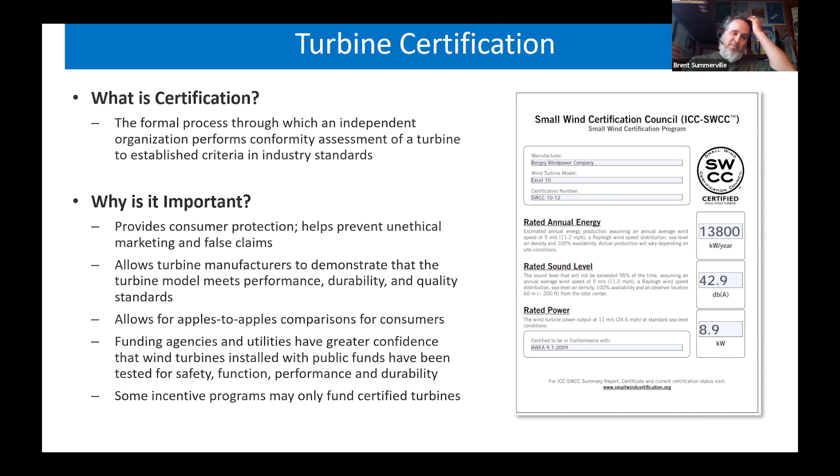State level incentives have been in great flux, but I just pulled this text out from a recent IRS notice of proposed rulemaking for Section 48 commercial tax credits. And finally, after much help from the Distributed Wind Energy Association and the Department of Energy, we've got an updated list of eligibility requirements for these proposed tax incentives.

And so the good news is they have a requirement that the small wind turbine must meet the quality standards of the AWEA standard 9.1, IEC standards that apply to distributed wind and small wind, and they've proposed to add the new ANSI ACP 101-1-2021 small wind turbine standard and subsequent revisions. So that's good news. We've been pushing for the IRS to keep things updated per the standards, and now they have a proposed rulemaking text to do so.

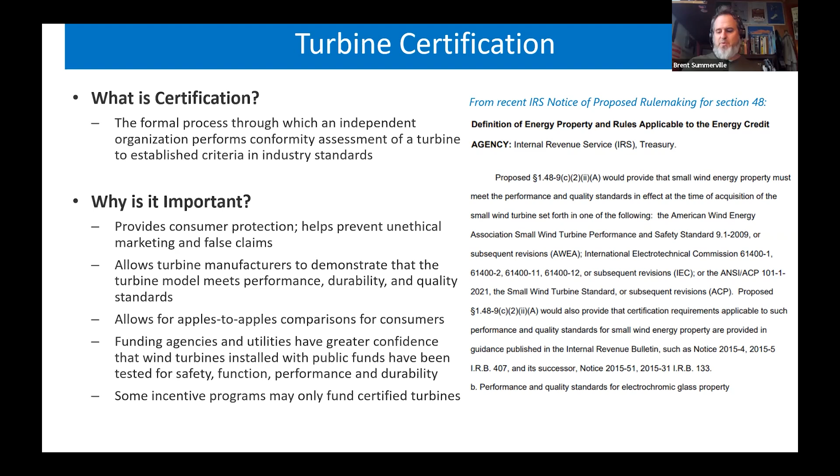So this is really what drives the motivation to certify your turbine, not only for these reasons shown here, but to just be eligible for, to have your customers be eligible for these incentives.

So where are we with the small wind turbine standard? Well, it all kicked off at the very end of 2009, where the industry worked hard to create our own national standard, AWEA standard 9.1. And it has been utilized by testing organizations, turbine manufacturers, certification bodies, incentive agencies, and consumers for many years. The standard did go through a revision cycle through AWEA, but there was some flux and change within the AWEA organization.

ANSI remanded that revised SWT-1 standard that came out in 2016. And then after that, AWEA became ACP, American Clean Power Association. And then the industry worked with ACP, including NREL, Distributed Wind Energy Association, and other stakeholders to develop this new latest, greatest ANSI-approved ACP 101-1, which came out in late 2021. So that's their current small wind turbine standard in the US.

And here I'll pull this out of the distributed wind market report from Pacific Northwest National Lab, and it shows the number of new certifications per year. The standard came out in late 2009. SWCC was stood up in 2010, and then certification really took off in 2011, '12, and '13, bringing up the number of certified small wind turbines to about 13. Another bump up took it to about 17 in 2018.

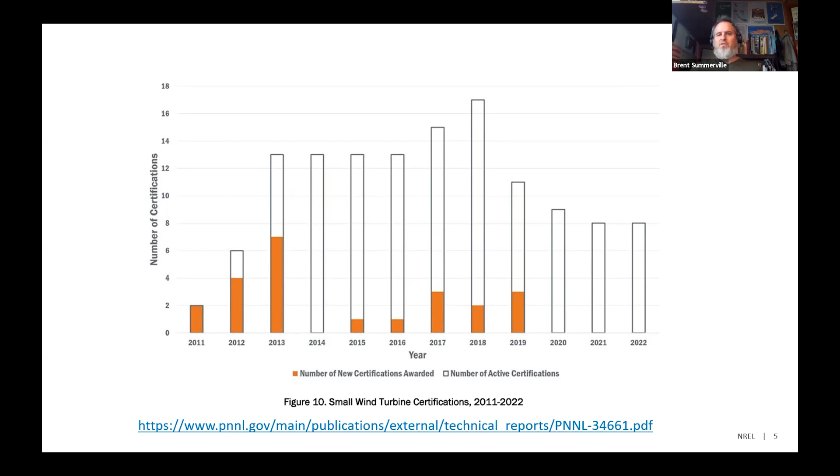And then, as Mike Bergey noted earlier, it was a rough few years for the industry. Some of the manufacturers focused elsewhere, and certifications expired, and we settled back down to now, I think, 8 certified turbines, and so it's picking back up again.

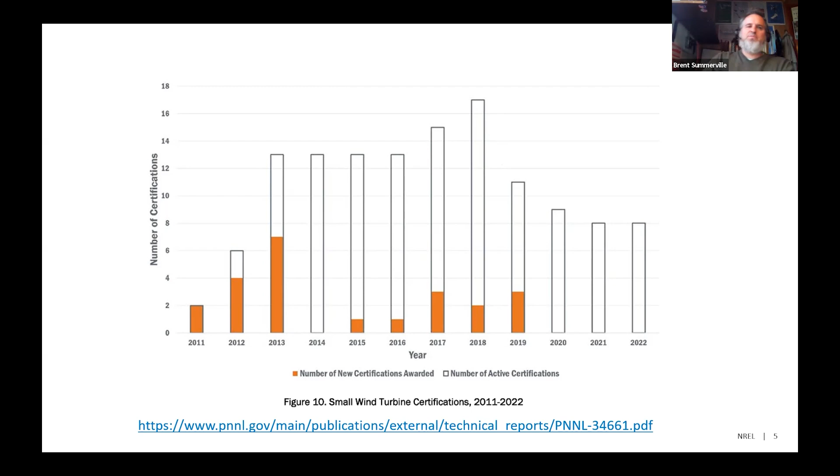But back to that ANSI ACP 101-1 standard, something new. These are all new things in the standard. The scope used to follow the scope of the international standard IEC-61400-2, which would be 200 square meters of rotor swept area in modern turbines with a low specific power, these days that's a 20 or 25 kilowatt machine. But we increased the scope to apply to turbines up to 150 kilowatts of peak power for this standard. So that was a sizable increase.

It's broken up into sections, and it's not a standalone standard. In other words, it points to and incorporates the suite of IEC standards put out by the International Electrotechnical Commission, where groups of experts work all the time in the background to develop and maintain the standards for many, many products, including wind energy. So it'll say, go do a power performance test per IEC 61400-12-1.

The small change here is that since the anemometer and the turbine tower under test are so close, we see site calibration values where you have an anemometer to measure the wind, and one where the wind turbine will be, and you compare those wind speed measurements to get a correlation factor. We see those factors really high, in the 0.98, 0.99 range, meaning the measured wind speed is very similar to the wind speed at the turbine.

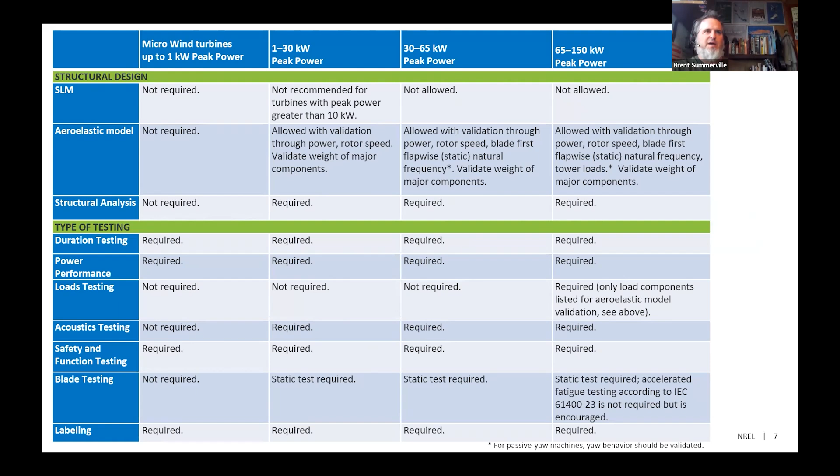So there's a little table at the very back of the standard, which is for sale on the ACP site. I can dig up a link later and put it in the chat, but we've got categories here. Under 150 kilowatts, there are 4 categories of sizes, from micro wind up to 30, to 65, and 65 to 150 kilowatts. So here you see that there are limited requirements for micro wind turbines.

You do a duration test, a power performance test, and a safety and function test, and you get a label, but you don't have to do a blade test, an acoustic test, or loads testing to validate your model, because there's no hard requirements for structural design at that level.

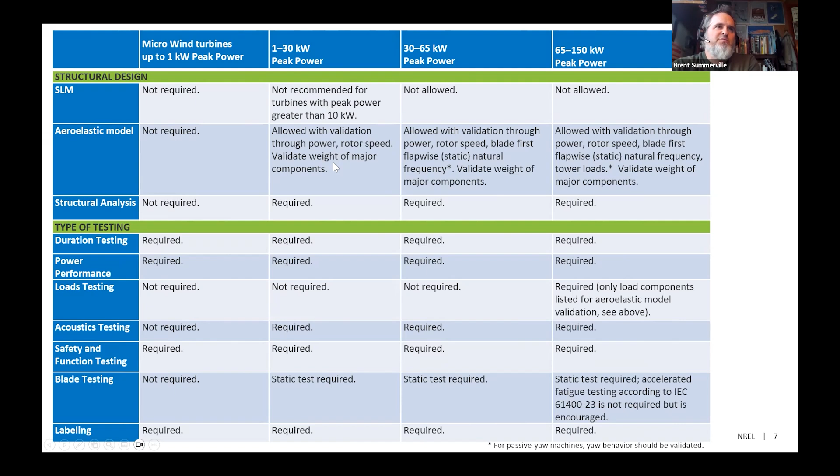For this level and beyond, we see increasing measurements for validating the aeroelastic model. We see varying requirements of the simplified load model across the sizes. And likewise, the testing requirements vary across the sizes, where blade testing is not required for micro, but is for all the others.

And when you get to the largest category, it is recommended, but not required, to do accelerated fatigue testing.

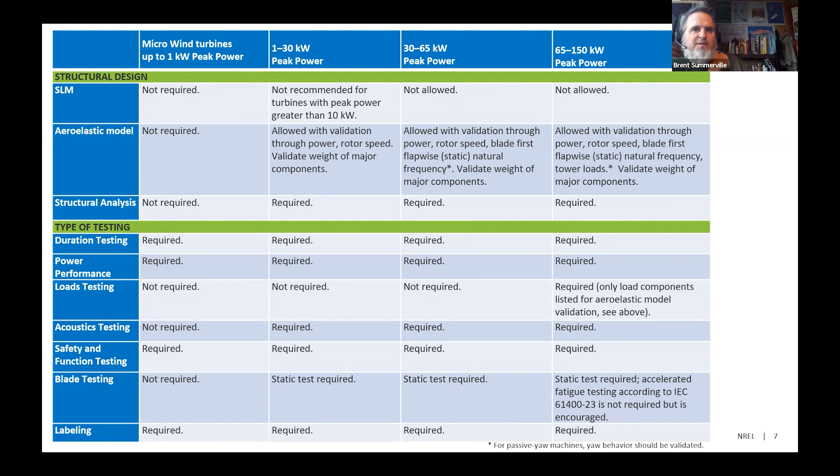There's lots of detail behind all of the changes made within the standard, and they're captured in this report. For example, the what-if analysis on implementing the changes to the duration test on some past tests showed it would take the average test period down from 10 months to 4 months, saving lots of time and money by removing a lot of requirements that did not show a lot of value, and boiling it down to a shorter test to assess the normal operation of the turbines.

So here's our current list of certified turbines from the PNNL market report: the Bergey XL 10 and 15, the Eveready Kestrel, EOCycle S series, the HiVawt Colite or the high volt machine, the DS3000, the Primus turbines are now operated by Rise Energy, the SD Wind 6 kilowatt, and the SkyStream is back on the list.

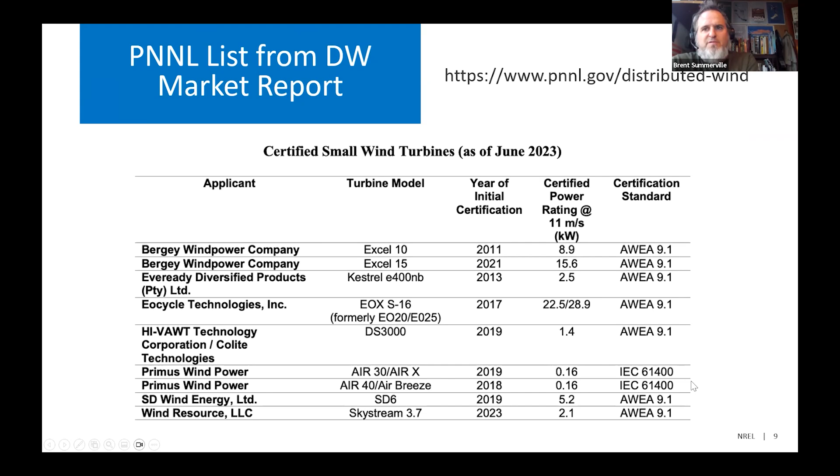Several companies are in the process here, but these are all certified to the old AWEA 9.1 standard, except for the Air series, which were certified to the IEC standards.

Okay, so that was the current state of certifying a small wind turbine up to 150 kilowatts in the US. We've reached a pretty good space where we have a certification body and a standard, and things have been going for a while. The other option, as you heard about a bit yesterday when we talked about the topic areas,

is type certification through IEC-RE, which stands for the IEC System for Certification to Standards Relating to Equipment for Use in Renewable Energy Applications. It has a system for wind, solar, and marine technology. It's a global certification system, intended to be usable for global markets, instead of a national standard intended for a national market.

The IEC-RE develops operational documents, ODs, which describe the requirements of type certification to the relevant IEC standards. This replaces the old -22 standard, which described type certification. And they have two routes.

One is through operational document 501, which is wind turbine type certification for wind turbines of any size, per the scope of IEC 61400-1. If you go look at the IEC-RE website, you see over 100 valid type certificates listed, and these are multi-megawatt turbines with very large rotors.

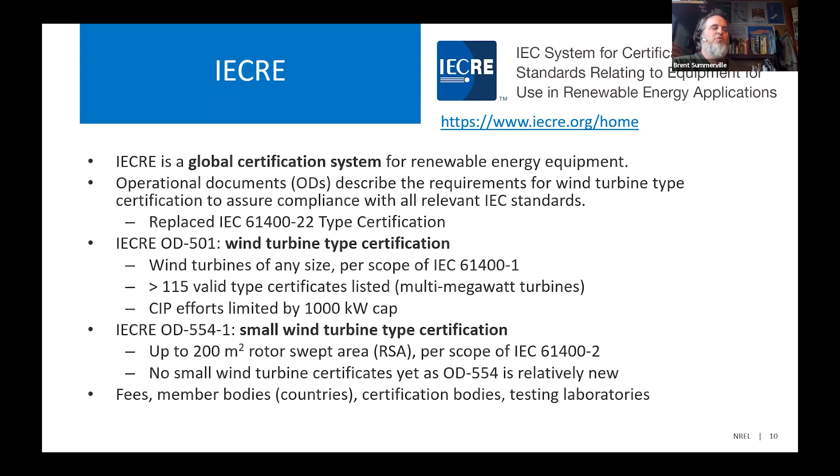And IEC-RE is unique in that it's a self-contained scheme. Member bodies, which are the countries that participate in the program, pay fees to join, as do member certification bodies, testing laboratories, inspection bodies, and other members.

For example, if you go to the IEC-RE website, you see their list of member certification bodies that are actively offering type certification in the IEC-RE system.

So we've got two different pathways here. In the US, ACP 101 is your standard if you're up to 150 kilowatts, and the ICC-SWCC is your certification body. If you're looking at a larger turbine outside that scope, or for a global solution, you can go the route of IEC-RE.

And this type certification on the small wind side, both ACP and IEC-RE both point to the International Small Wind Turbine Standard IEC 61400-2. Currently, the scope is up to 200 meters squared rotor swept area.

I am the convener of the maintenance team for this standard. Maintenance teams are called MT, and this is for -2, so it's MT2, and we are actively working through the 4th revision of this standard. It kicked off in May of 2023.

The current standard is stable and will not be touched until the very end of 2025, so we are targeting 2026 for a new -2 standard. It took a long time and a lot of discussion, but

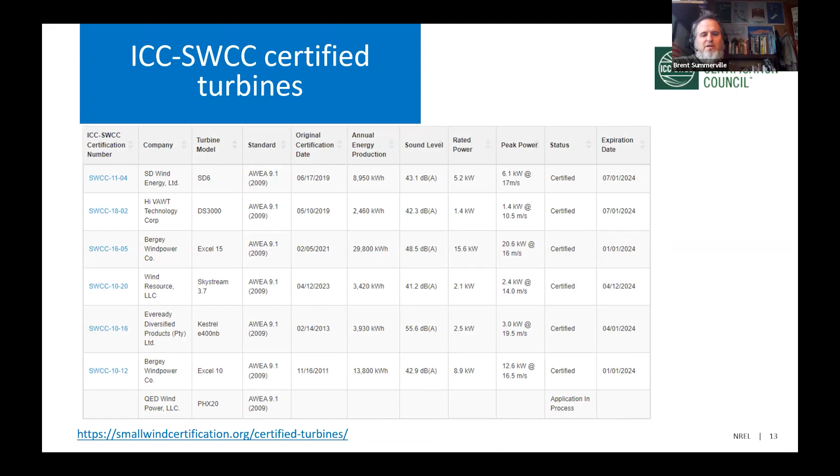All right, great. Thank you very much, Brent. It's a pleasure to meet with all of you. I'm going to be going over a bit of information about the certification process that SWCC operates in the US.

Using primarily ACP 101-1. Many of you may know SWCC from our previous name. It was independent up until about 2017 when it joined the ICC-ES organization, or International Code Council. ICC-ES is the branch that certifies a wide range of building products. So small wind certification fit neatly into there, and we're happy to have that alongside some of our other renewable energy certification programs.

So I'll be talking a little bit about the approach that we use. If you've worked with SWCC in the past, this should be relatively familiar, although for some of you this may be new. I'll be talking about something called preliminary reviews. We use preliminary reviews as a means of starting the certification process, and I'll explain a little bit why. Before I get into that, though, I just want to make sure that we're on the same page as far as what certification is.

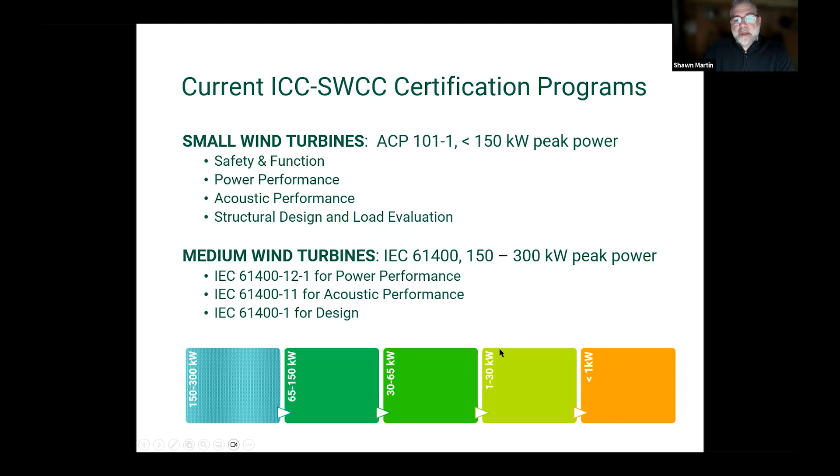So let's talk a little bit about what's in and out of scope. Oftentimes there's some confusion on this part as well. First of all, our certifications cover turbines. We're looking at things like the blade, shafts, gearboxes, bearings, and so on and so forth. You can read down through.

Notably, there's a couple of things that aren't included, and Joe Sposey yesterday touched on electrical listings. That is under a completely different standard. We are asked this fairly frequently, but electrical safety listings are not included in ACP 101-1 or 61400 standards. Now, we do look at them, but only in the context of durability overall, and in terms of the standard power production ratings that are generated as a result. So we are not looking at electrical safety. We are also not looking at that for the generator, the inverter, or any power conditioners, or the associated controls.

The other thing to note is it does not include the towers. That includes the foundations and any tilt-up devices or mechanisms. The ACP 101 and 61400 certifications end at the mounting point to the tower. So it's important to understand what's in and what's out.

Okay, a little bit about the pathways, the ways you can reach certification, and the way that preliminary reviews factor into that. I'm going to delve into that now. I've denoted them here with A, B, and C. A is a new certification - that is a turbine that has not been tested to the standard yet.

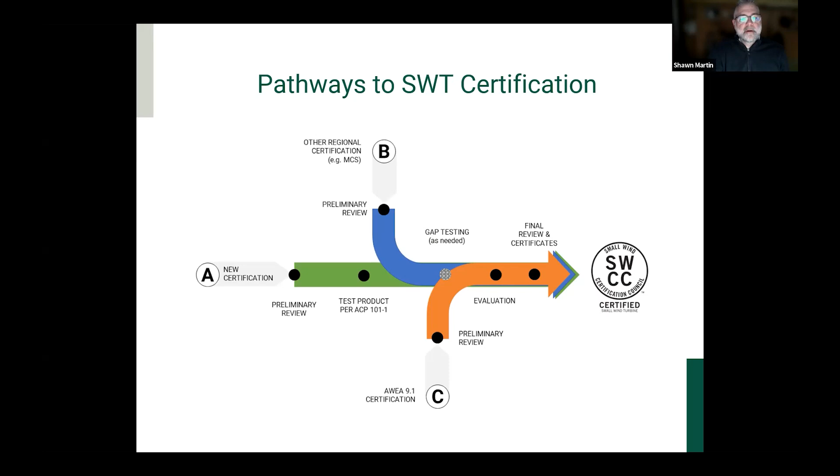Lastly, in some cases, you might come in with an AWEA 9.1 standard certification to the older version of the standard. Again, same thing, we would review the circumstances of it, and determine whether certification can be granted based on the information contained within those reports and analyses. So all of those are potential pathways, but they all begin with something we're calling preliminary reviews. So let's talk about what they are a little bit more clearly and get into the specifics.

We do preliminary reviews for several reasons. Number one, first and foremost, we confirm eligibility for SWCC certification. We don't want to waste your time or anybody's time if it turns out that your turbine is not within the scope of the certification program. So that's the first key point right up front: is it eligible? If it is, we move to the next steps.

We might look at any existing test reports or analyses you may have to see if we can use those. If you don't have them yet, we might look at your test plan and how you're going to be doing that, where you're going to be testing, what organization you'll be testing with, and what kind of testing configuration you have in mind to qualify with the standard. We want to get you confirmation early that you're on the right track.

We would then establish the scope of the testing that's necessary. As we talked about before, the testing requirements scale with the different categories, with the size. So we would work with you to identify specifically the tests within the standards that would be required for your particular turbine, because they do vary based on size and other criteria.

We would vet your testing organization, whether you've done your testing yet or not. Either way, we review the testing organization's suitability to see if the data is acceptable. If you haven't done it yet, we would vet the site and the organization's qualifications, and we would review your general test plan for consistency with the relevant standards.

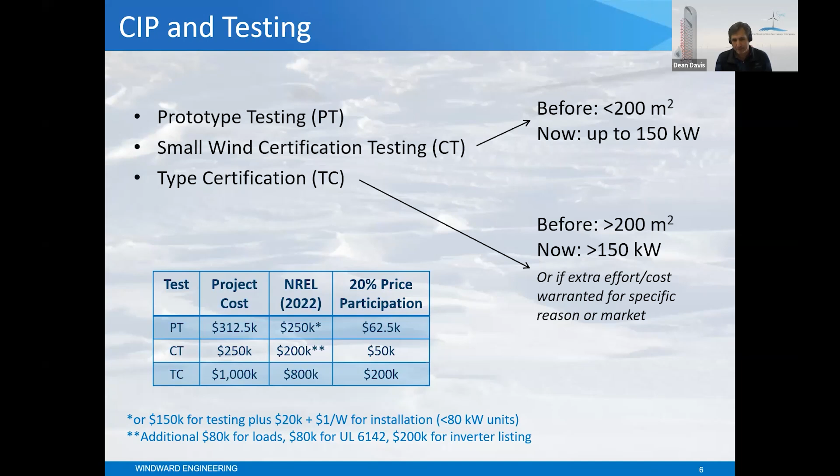So what is involved or required in terms of certification? I'm leaving prototype testing out, although I think it makes a lot of sense, if you were doing prototype testing, to still follow these testing standards. It's a little meaningless to prototype test and not set it up like the standard, because at the end of the prototype test you might be interested in getting more funding or investors, and you want data that is of quality that will be accepted by others. So although I'm not focusing on prototype testing, because who knows what the goals of that are, I think knowing the standards, and testing to the standards, still makes sense under prototype testing.

But in terms of certification, we've got design evaluation, and Shawn went through some of this. And then we really have these 4 required field tests: power performance, acoustic, safety and function, and duration.

For type certification, you still have the design evaluation stuff, but the tests are slightly different. You still have power performance, safety and function, but you also have mechanical loads and blade structural testing. Acoustic is actually optional. And then there's some additional stuff around manufacturing and a final evaluation.

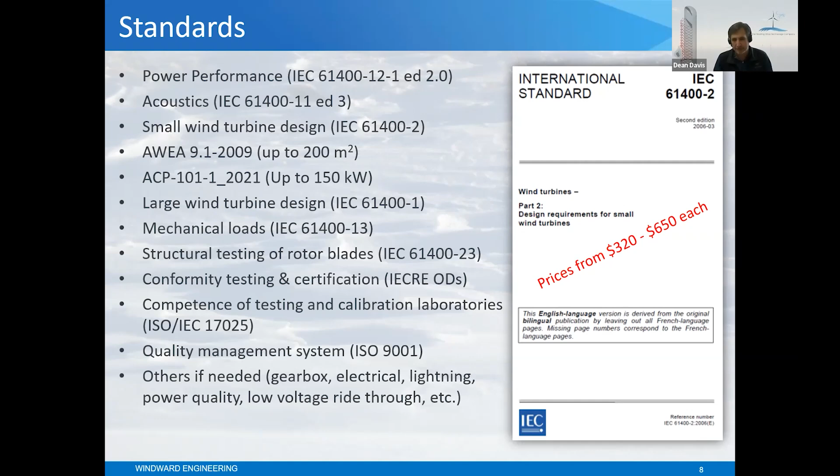If you're a manufacturer interested in certification, you're going to need to work with some certifying body. For me personally, I've worked with SWCC and Intertek, but I believe there's a longer list than that you can work with, including UL, DNV, and some others.

NREL has tested numerous small wind turbines to the standards. They're at the Wind Technology Center. UL down in Texas has a test facility. Renew Test is nearby in Pampa, Texas.

I wasn't sure if Appalachian State is still doing some work, but I think Brent showed there was a test going on, so it sounds like they're still doing some testing. Yeah, only Rocky is there with Sunsight at the moment.

And then I have Intertek here, which was in New York. I asked Joe, is that still up and running? And it sounds like it's not. So that one's not around, although Joe Sposey is the one that set that test facility up and really made it happen. He's a great resource for anyone interested in doing testing, and he'll set you up with some other location. And then one that's new to me is Wind Test North America, which is in Iowa.

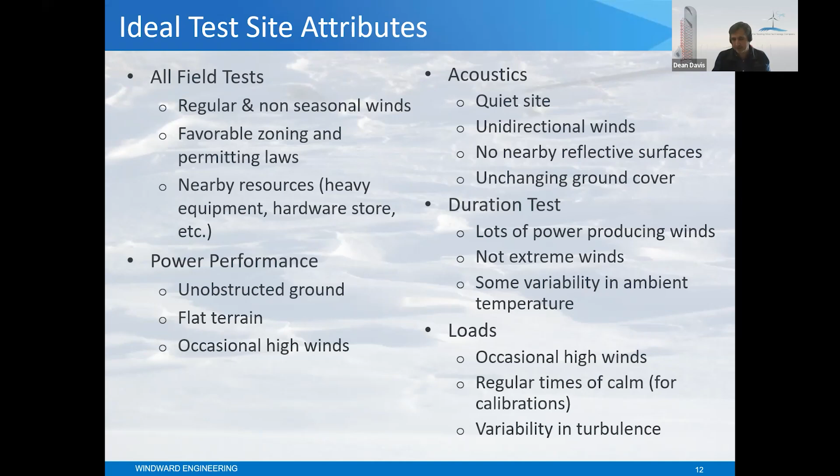So the ideal test site might not exist, but shortfalls can be mitigated with ingenuity, time, and money. Our site checks a lot of boxes, but in terms of flat ground and unobstructed, it's not - it's a very congested site. But we can work around it.

Getting into more specifics of power performance - I start with power performance because I see that as kind of the foundation test. I like to set up my tests for power performance, and then I can use that same instrumentation for all the other tests. For acoustics, I can use it for duration, for safety and function. So power performance is kind of a foundational test.

So I would put my Met tower in accordance with power performance. I would set up my instrumentation in accordance with power performance. And this would apply for prototype testing as well.

When you are doing power performance for certification, the IEC standard has a section around obstacles and how to evaluate those, and whether you're going to exclude sectors - wind sectors. An obvious wind sector you exclude is when the wind turbine is upwind of the anemometer - that's always going to be an excluded sector. But if you've got a big building off to the side, that might result in an excluded sector as well. The standard goes through those details on how to evaluate obstacles.

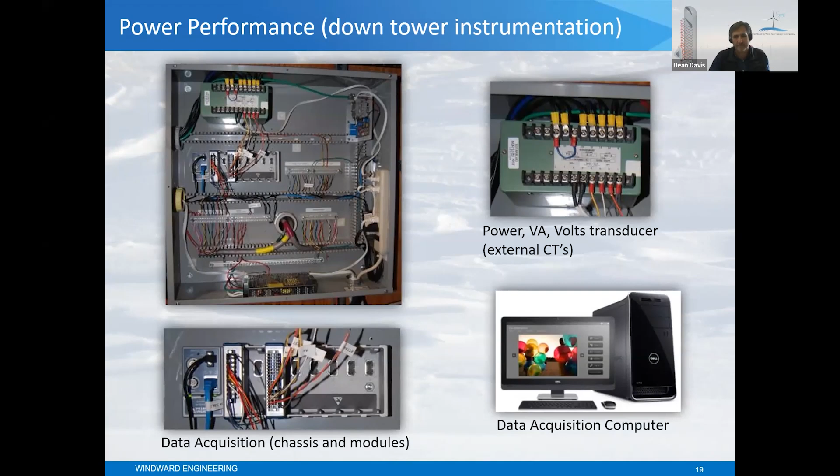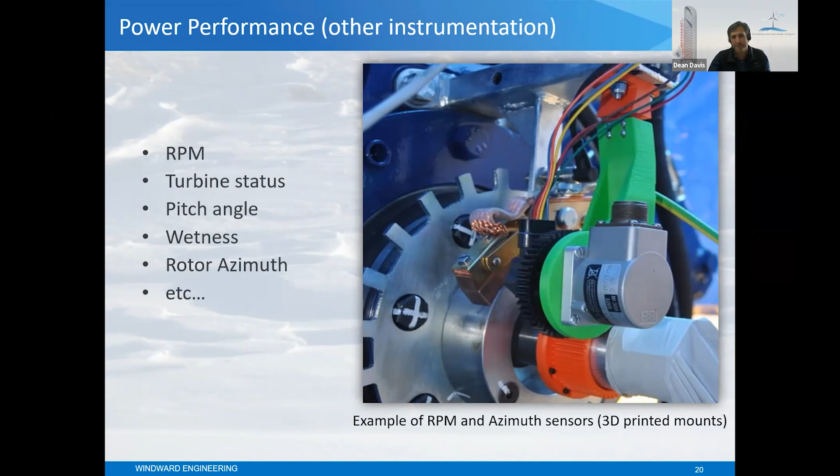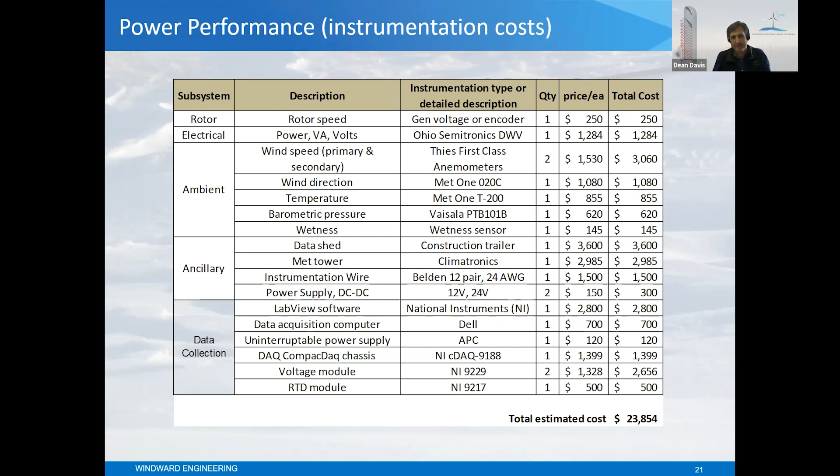Here I just kind of wanted to throw something in here around some of the cost of this instrumentation. Now, I haven't gone through these numbers in a few years, and post-COVID, seems like everything's significantly more expensive. So I'm probably on the low end at this point. But again, I just want to throw a little bit of an idea of what some of this stuff would cost.

All your sensors are going to end up needing calibration sheets. If you're buying new sensors, you can just request that it comes with the calibrations, or if you have sensors already, you can send them to Transcat, or there's various calibration laboratories that you can send your instrument to and get calibrations for. You're going to need those calibration constants to set up your data acquisition system. There's uncertainty information in there that's going to be required for your uncertainty analysis. These calibration sheets will end up going kind of as an annex or an appendix in your final report. So they're important in that regard.

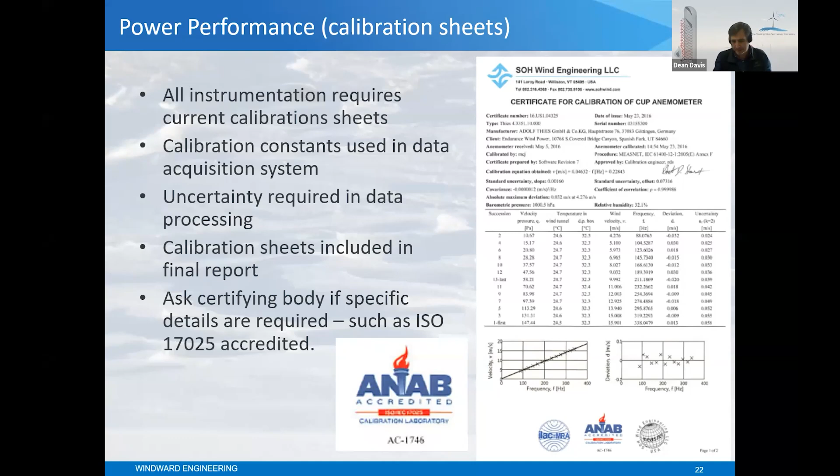And I've run into situations where I've been requested to get 17025 certified calibrations, versus other times it hasn't been an issue, but you might want to talk to your certification body on if that's a requirement or not. And usually a 17025 is a little more money type of thing.

So, okay, at this point, let's say you've found your test site or you're working with an agency, you've got your instrumentation all set up, you've got your DAQ system, and you're ready to start power performance. So what does the standard say in terms of requirements? Obviously you can't collect data for 2 hours and then say, oh, I'm done. You have to reach some kind of thresholds to say you're done.

So I've got here 2 different scenarios, and this is all coming out of the IEC-12 standard. Technically, the -12 standard is for wind turbines in general, not for small wind turbines. So there is an Annex H that's for small wind turbines, and according to IEC, that would be less than 200 square meters.

So they want a minimum of 10 minutes in each bin, where the data set is a 1-minute data set, and the bin widths are 0.5 meters per second. And you want to go from 1 meter per second below cut-in to 14 meters per second. And the total data set is to be 60 hours or larger.

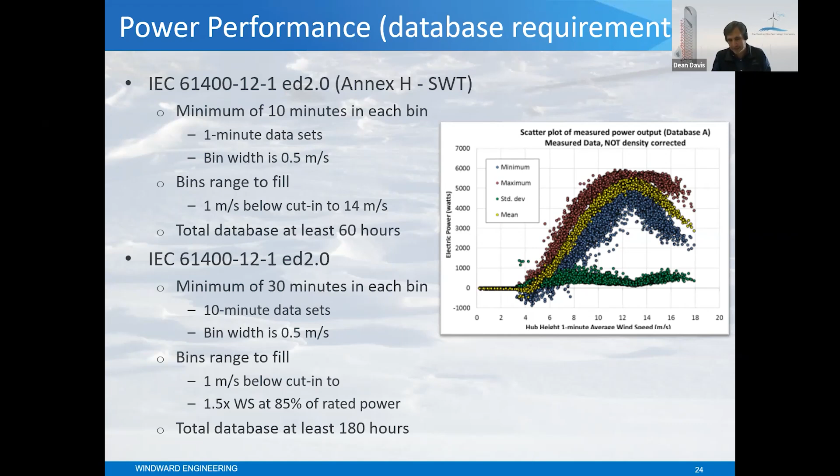And then if you're again in -12, but not necessarily a small wind turbine, now we want 30 minutes in each bin, and now we're dealing with 10-minute data sets. The bin width is still 0.5. Low end, 1 meter per second below cut-in, and on the high end it's this complicated 1.5 times the wind speed at which 85% of rated power is reached. And then about 3 times larger data set, they want 180 hours for the total data set.

And how long does it take to get that, to get 60 hours or 180 hours? It really comes down to how many sectors are invalid and how often the wind comes in those invalid sectors. For me, I usually have a very small allowable sectors, but our wind is fairly unidirectional as well, so it's usually not a big problem. But again, how much data do you have to throw out because it's coming from the wrong wind direction?

And then I think most commonly, you get your power curve, but you're kind of waiting to get those higher winds. You just need to see how that power curve is going to roll over and how high a wind speed you need to get to, to quote, complete this power curve. NREL suggests 3 to 6 months.

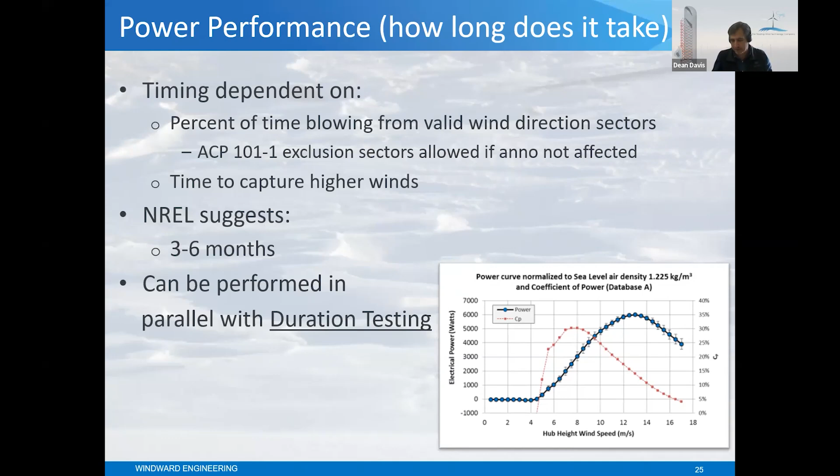For me, we can be doing duration testing, which is looking for this 1,000 hours of power production. We can kind of just put the power performance in that time frame. So in my opinion, power performance shouldn't be on the critical path. I think the duration test would be on the critical path and the power performance would just fall within it.

In terms of data processing, I think it's definitely within the realm of Excel. You might need some array functions. And if you're on a laptop, especially an older one, it might be a little challenging in terms of computing power.

The standard uses clear and well-defined equations. I don't think most people have any issues with the standard. It gives you the equation, what you're after, and describes what the variables are. That said, there's enough detail.

By the time you finish your Excel spreadsheet, you'd want to do some kind of checking. Maybe your certification body can do a round robin with you and say, hey, we've got this data set, we want you to do power performance and come up with your power curve with uncertainty on this data set, and do some checking. I think it makes sense. Although it's fairly straightforward and simple in some ways, there are a lot of details.

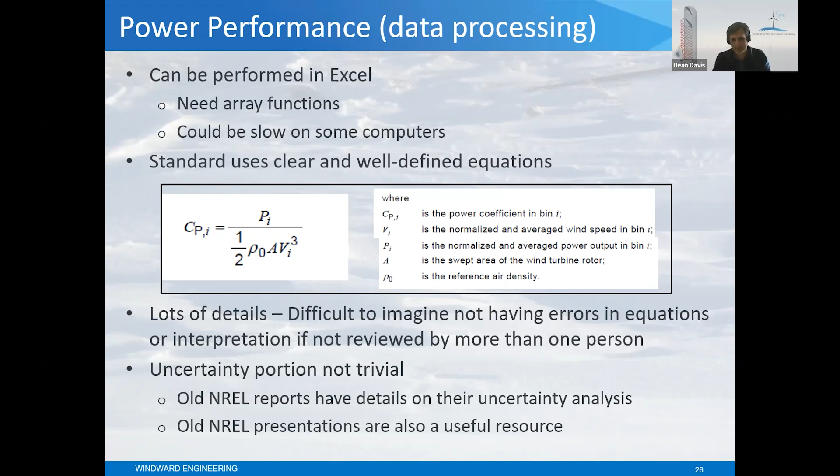The uncertainty portion is probably the harder piece. There are old NREL reports that have lots of details on their uncertainty analysis. I remember Arlinda put together some nice presentations around uncertainty, and Joe Smith as well back at NREL. So somewhere in the universe there are some good presentations around uncertainty analysis.

Okay, so now at this point we've collected our data, post-processed it, got our power curve and uncertainty analysis and that kind of stuff. We've got to put together this final report.

We can go straight back to that standard, -12, and it has a whole section on what needs to be in the report, again laid out step by step. So I think the standard's really good in just stepping you through this process.

And then we have this added bonus of NREL's got great templates out there. You can go look at the Swift power performance or various power performance reports that they have online. In a lot of ways I just say, you know what, those are excellent reports, I want to just make my report look like that.

Just as an example, it's kind of in the 50-page range, where about half of that is really presenting the data and describing details about the site and the turbine. And then the other half is appendices, around the site analysis and calibration reports and stuff like that. Here's just an example.

I pulled this off another presentation I did, but here's a power curve. From my experience, this is 19 days in. After about 5 days, maybe a week, the power curve is fairly stable. The first day it's not smooth, it's just not a smooth curve. The second day it's getting smoother, third day, and by the 5th day it's pretty smooth. It typically hasn't changed much after that.

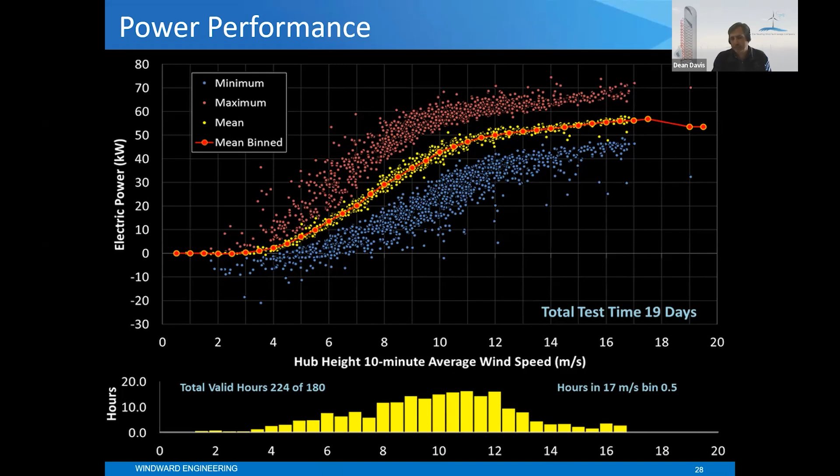So moving on to acoustic testing.

The good news is most of the instrumentation is now in place, assuming you've set up around power performance, and the test times are much shorter. The bad news is there are some serious challenges around the data collection. The post-processing is a magnitude harder, I think, than power performance. And you do need some new, expensive instrumentation. You need a microphone, an acoustic calibrator, a ground board, and various other pieces of equipment that you don't have after just doing power performance.

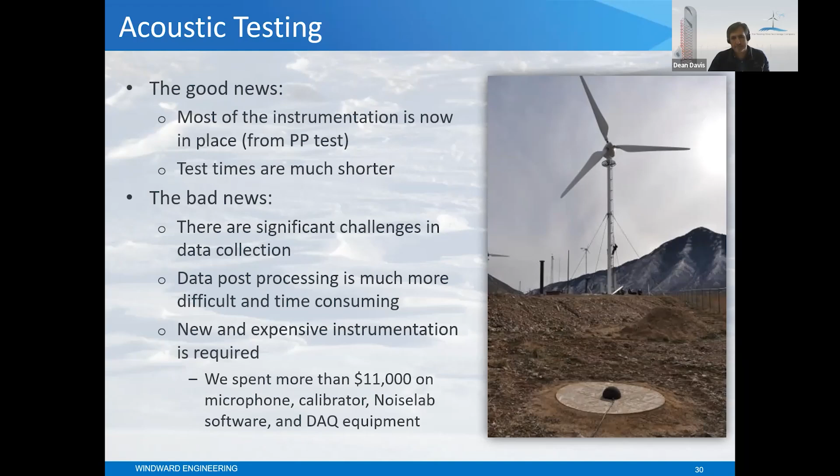As we saw in the -12 standard, the acoustic standard has an Annex F for small turbines. So that's for turbines that are less than 100 kilowatts, and it kind of gears itself towards that.

Here we need to go out to 11 meters per second minimum, with 1 meter per second bin widths. The standard also says, if possible, go up to cutout. I could see how, if you've got a small turbine that furls or flutters, 11 meters per second might not capture its total acoustic signature, so in that situation you might want to go higher.

Measurements are pretty short, 10 seconds each, and again 1 meter per second bin widths. We want 12 measurements for each bin with the turbine operating, and a minimum of 12 for the background with the turbine stopped. As you can tell, it's not a lot of data.

More likely you can collect this in weeks, not months. I think for me, typically, it's about a week, maybe a little longer. Sometimes I struggle to get certain wind speeds.

The microphone, as I mentioned before, needs to be downwind of the turbine. When you're dealing with larger turbines, that sector is kind of tight, plus or minus 15 degrees. With smaller turbines, they open that up, understanding that they're probably much more dynamic in yaw. The measurement chain needs to be calibrated before and after each measurement.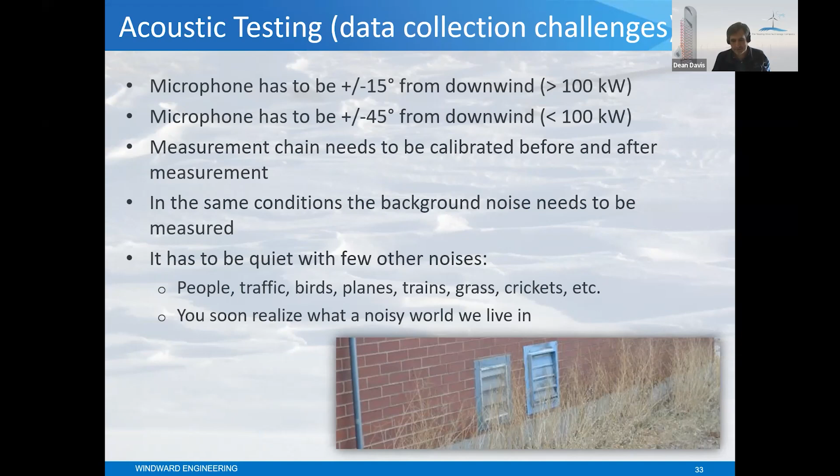This picture shows vents on a nearby building. Never thought anything of it, but out there at 3 in the morning, those vents are just flapping up and down in the wind. It just makes me realize we really live in a noisy world, and we kind of accept it - it's just the norm at this point.

In terms of post-processing, I've used Noiselab. I'm sure there's other software that's basically going to take that recording and convert it to data. For full automation, you probably want to be programming in something other than Excel. I've built my spreadsheet in Excel, but it really does max out my computer. Actually, for many years, I kept an old version of Excel because, for some reason, it ran much faster than the newer version. So that can be a challenge.

Again, as is the case with power performance, I think the standard uses clear and well-defined equations, but the equations are much more complicated. If you compare the CP equation I showed before and this one, there are multiple subscripts, terms raised to powers, and summations. So the equations definitely get more complicated in the acoustic world.

Interpretation of words can be challenging. While we were doing some round robin work one time, in my opinion, there was a sentence that told me to use one equation, but that came up with a very different result. When the certifying body said no, that sentence doesn't mean that, I agree with them - I think they were doing it the correct way, but to me that sentence did not say to use it; to me it said use the equation I was suggesting. So there are areas where just the words can lead you down the wrong path, even though the equations themselves are well defined.

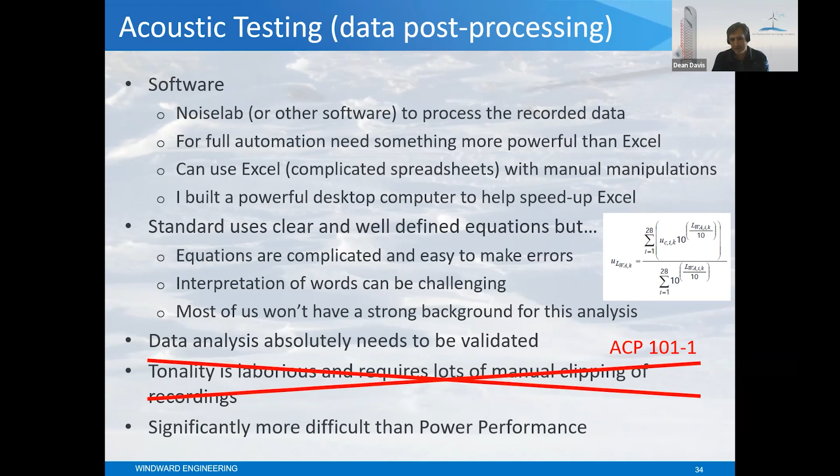On to the duration test. The purpose outlined from the standard is structural integrity, material and performance degradation, quality of environmental protection, and dynamic behavior.

And I think that is true, that's kind of somewhat what we're after. I think everyone recognizes that the duration test will capture infant mortality kind of stuff. Does it suggest it's going to last 20 years? I think we'd all agree it doesn't suggest that. But it gives us some basis to say this turbine operates correctly and not in some crazy fashion, and that it can handle some amount of variable input from the wind.

So the next list on the requirements, I've outlined what used to be the case within the AWEA standard. And again, one of the goals of the ACP 101 was to really reduce the labor and effort and costs associated with certification. So a lot of these numbers have been knocked down quite a bit.

Used to be this requirement about greater than 90% availability - that's been removed. At least 6 months of operation - that's been removed. It used to be 2,500 hours of power production, now that's 1,000. It used to be, and this was probably where most people got caught up, these higher winds.

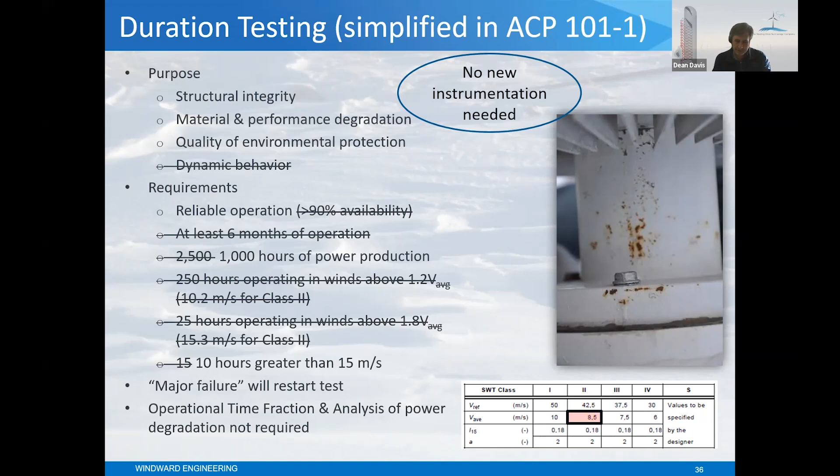Major failure will restart the test - that's consistent before and after. And this operational time fraction analysis of power degradation, which was required, is no longer required. And my little bubble over there - no new instrumentation needed. Again, if you've set up for power performance, you've got all this data coming in and you're just collecting more data.

Safety and function. You want to go through and look at the O&M procedures and other manuals, take a look at that, evaluate whether it's appropriate, review personnel safety topics. So if the turbine's something you would climb, does it have proper warnings and safety labels, and then a little bit of analysis or a check on the safety related around climbing.

The function side is really kind of similar to a commissioning procedure, but we're going to collect some data while we're doing that. We're going to make sure on a grid fault, does it properly shut down or get to a parked condition or idle condition. And we might pull a sensor, an RPM sensor or something, again just making sure it has a proper control system to put it in a safe condition.

We might want to run some specific events like high wind startups or high wind shutdowns. And then ultimately, we're going to look through the data. We're going to look for this peak power, which is described in the ACP power limitation. We'll make sure it can limit its power, and then rotor speed, make sure rotor speed doesn't get crazy.

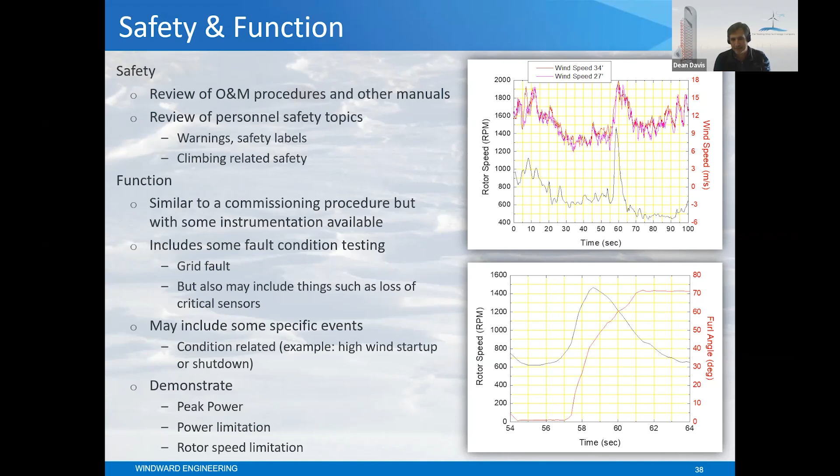I just threw a few plots in here. This is off a Whisper, but this was the highest - when I was doing some testing, the highest rotor speed just came out of a big gust that started at 7 meters per second and bumped up to 18 relatively rapidly, and caught that turbine unfurled and got the rotor excited.

This is the peak power analysis that comes out of ACP 101. So you've got your power curve and you find your peak power, then go down to 95% of that value and find the wind speed, which in this case is 11.5. Then you want 10 one-minute data points in each 0.5 meter per second bin for bins that are 5 meters per second higher and 5 meters per second lower. That's the capture matrix required to have confidence that we've captured peak power.

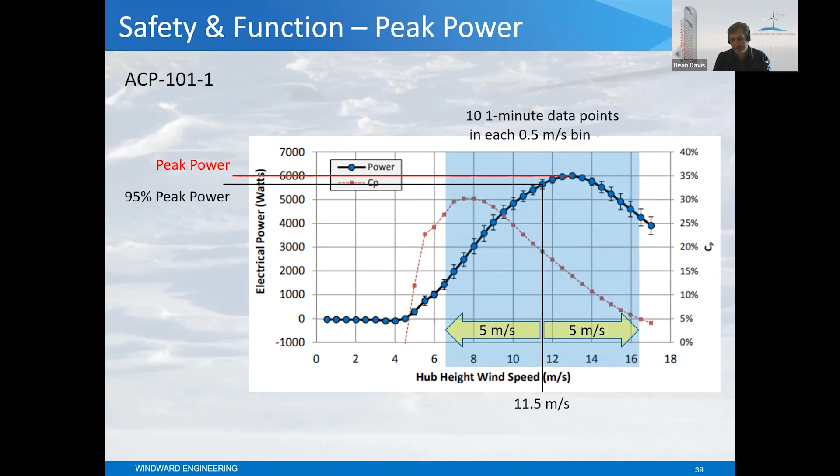This analysis would also demonstrate the power limitation, that power doesn't go crazy.

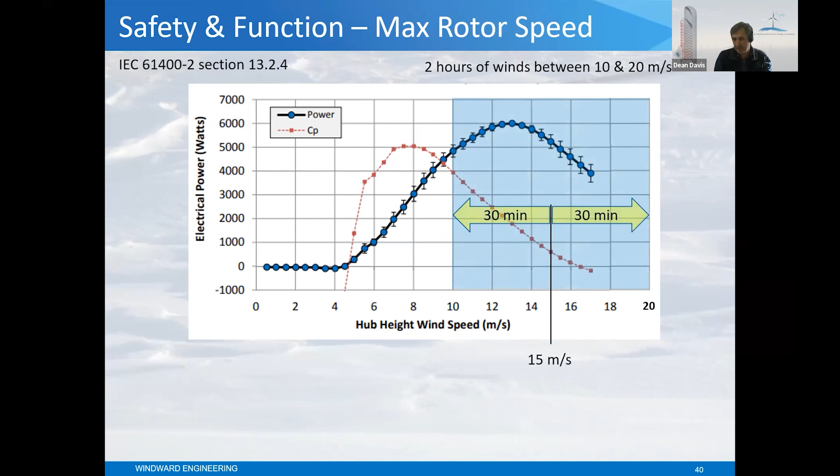In terms of max rotor speed, this is actually coming out of IEC 61400-2. It talks about 2 hours of winds between 10 and 20 meters per second, where you have at least half an hour below 15 meters per second and half an hour above 15 meters per second. Within that data set, we just want to look for the maximum rotor speed, and then extrapolate that out to the V reference wind speed.

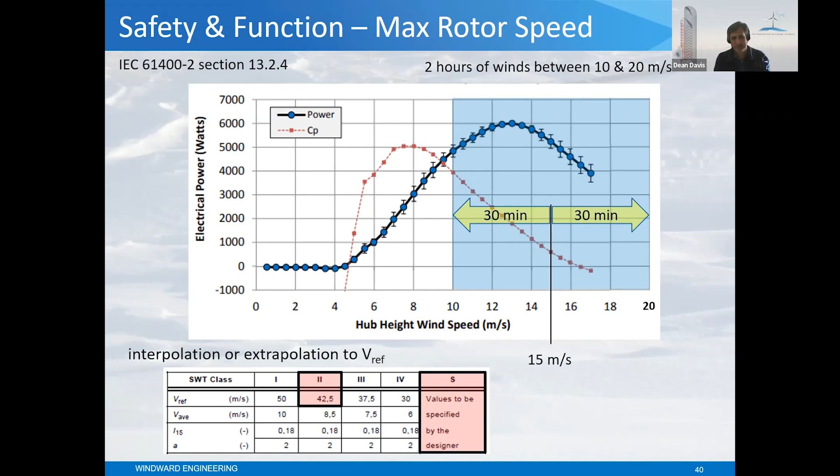Mechanical load testing - this is not typically done for smaller wind turbines, although you might measure some loads, but typically you're not going to do an actual report or mechanical loads test. It could be useful to validate some of the modeling, especially if you have a non-typical turbine like a VAWT or a ducted turbine. It is required for larger turbine type certification. It's a significant undertaking - expensive and time consuming. You use wind speed, temperature, and pressure as appropriate for this test.

And now you're going to add loads - tower moments, rotor moments, blade moments. To get stuff off the rotating reference frame, you're going to want a slip ring or some telemetry. We have a whole section on anti-aliasing modules. And then to support some of the loads you're measuring, you're going to want rotor azimuth, yaw angle, etc. So lots of good information comes out of loads testing - it's just expensive and time consuming.

Within the -13 standard, it talks about the minimum required data channels, and has a recommendation for additional channels. It talks about capturing loads during transient loads like braking, high wind shutdown, grid loss, startup. They want lots of data around normal operating conditions - they have a suggested range of wind speed to capture. As I mentioned before, they want some variability in the turbulence. They detail how to do the in situ calibrations, and like the other standards, they talk about data processing and reporting.

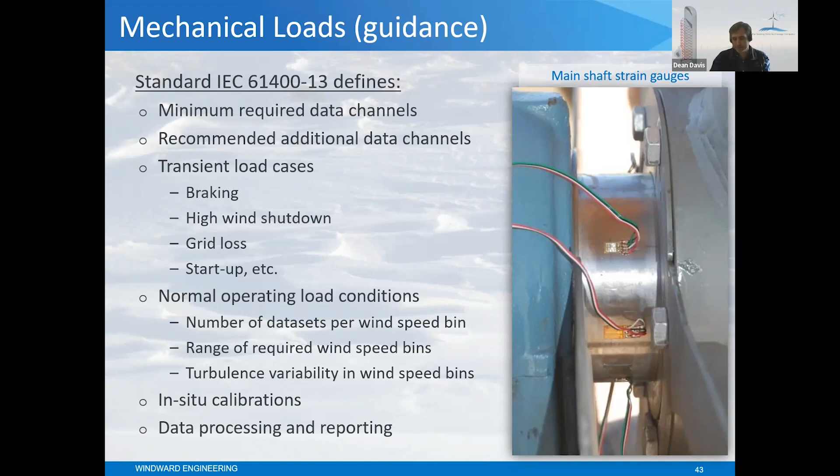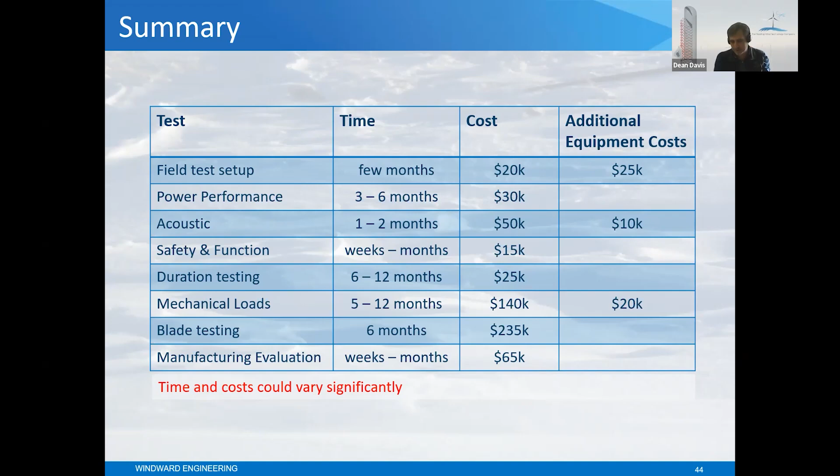So in summary, I'll put this caveat that time and cost could vary significantly, and I think that's the reality. But from my experience - and these numbers are from a few years back, so they're probably low - just to give you an idea of what these costs pan out to be. They're assuming acoustics isn't by itself, that it's really about collecting the data, processing it, and writing the report, not putting up the met tower. I'm assuming that most of the time you've set up power performance - everyone wants to know the power curve, so you're going to do that test no matter what. And if you're set up for that test, you're well positioned in terms of instrumentation and data collection for these other tests.

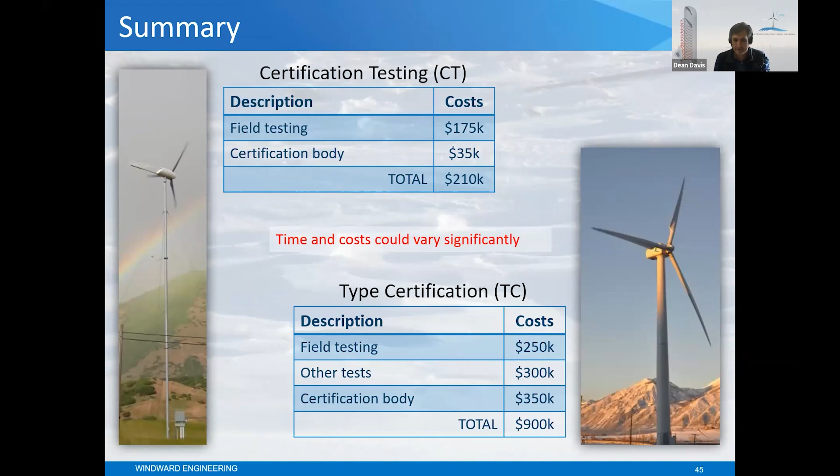Here's just focusing more on the certification costs. Again, don't hold me on these numbers, and they are a few years old, but I have here 200-ish K for smaller turbines and close to 900K for larger ones. These are somewhat aligned with the support that the CIP program is bringing to the table. And that's all I have.

Fantastic, Dean. Yeah, we've hit them hard with standard certification and testing today, but it's the right group though. Any burning questions for Dean before we go on a short break on testing?

Dean, I dug up a couple legacy reports, as you mentioned, one from Joe, one from Arlinda. But the question is if Dean has any additional legacy reports, that would be amazing. If anyone wants to dig around, I don't have a tidy collection of them, but it's an interesting idea to try to do that.

I do have reports on our website, which is windwardengineering.com. We've created reports there. Yeah, those are good too. And we modeled around your guys' reports, so hopefully they're very similar.

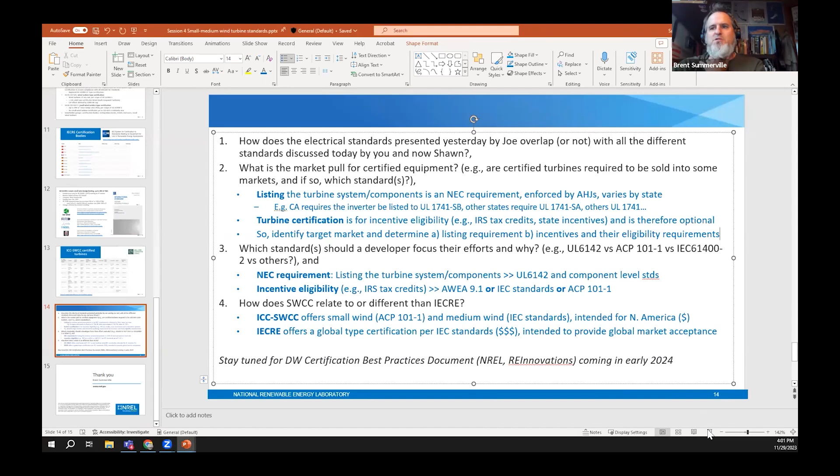We've heard a lot from Joe Sposey yesterday on listing of components to electrical safety standards, and today on turbine certification and the associated standards and testing for the purpose of evaluating your prototype and going to certification. So I realize it's a complex world to navigate. Here are some questions: How does the electrical standards presentation from yesterday overlap or not with the standards discussed today from me and Shawn? What's the market pull for certified equipment? For example, are certified turbines required to be sold into some markets, and if so, which standards?

Great questions. My short answer would be: listing, which is what Joe talked about - listing the turbine system and components within the turbine system - is a national electrical code requirement enforced by the authorities having jurisdiction in various areas. Unfortunately, as Joe presented yesterday, this varies quite greatly by state, but Article 694 for wind hasn't changed much recently, so it's leveling out. But still it varies - California, for example, requires the inverter be listed to UL standard 1741 SB, the latest and greatest. Other states require SA, other states require just UL 1741, and the differences are considerable between these.

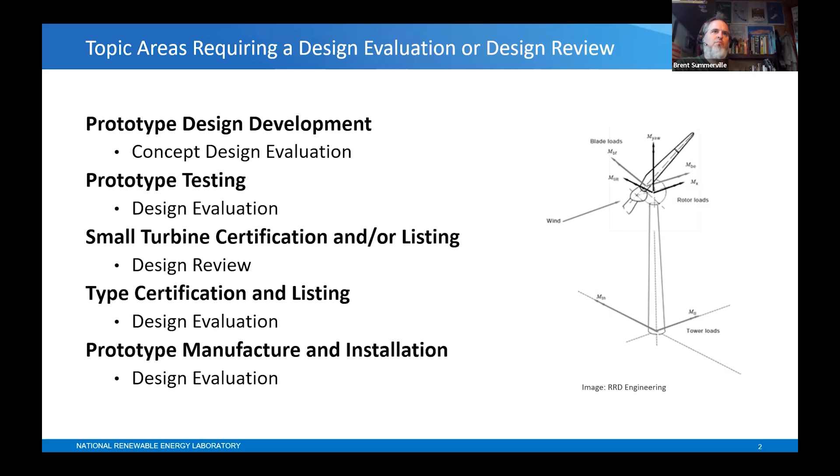An overview of what we're talking about here: we want the design of a wind turbine, the process is described in an informative note within AWEA ACP 101-1.

Design loads are the forces on the wind turbine as it interacts with the wind, gravity, and other forces. Design loads are obtained through calculation, simulation modeling, and/or direct measurement for a variety of load cases. Tomorrow we're going to have a great presentation from consultant Drew Gertz on the various design tools to get these design loads, for a variety of load cases, which are a set of design situations covering the most significant conditions the turbine system may experience in its life.

So that's tricky. What are the loads on the turbine components is hard to get, and a lot of the effort here is estimating those loads. Safety factors are applied to these loads, and the mechanical strength of the major components is evaluated considering the material properties, the ultimate loads, and the fatigue loads.

Good old mechanical engineering here. The maximum operating load as predicted by the design calculations or modeling is physically applied to the rotor blade in the static blade test to verify blade strength and deflection. It's the one mandatory component test that checks the deflection and strength of the blade.

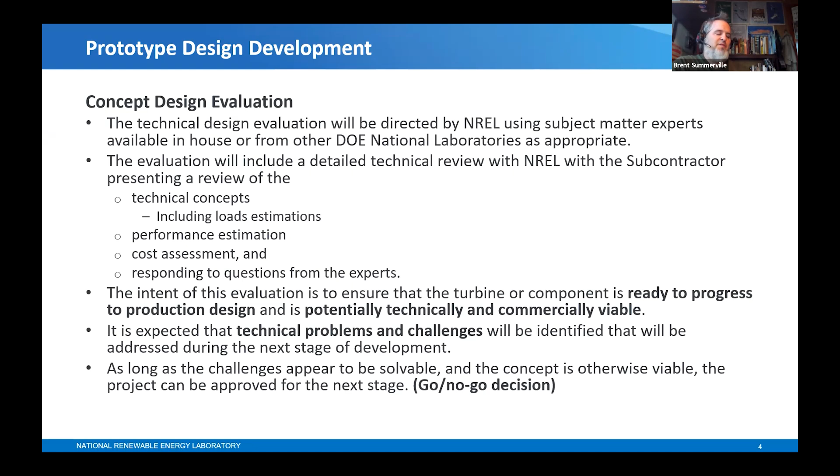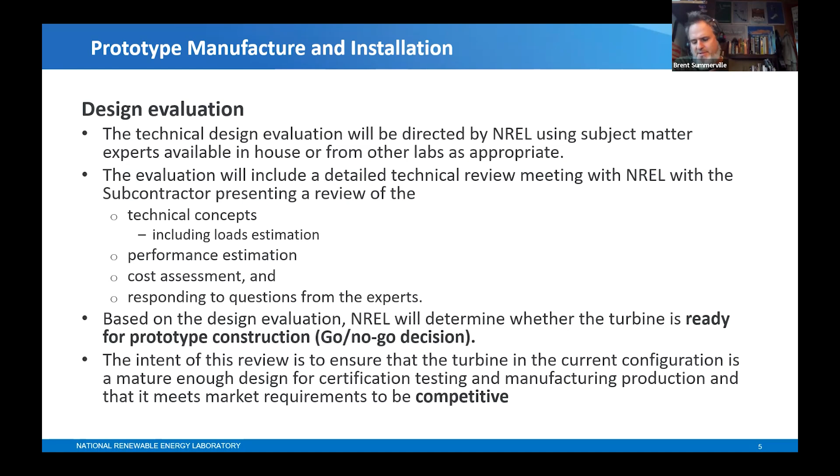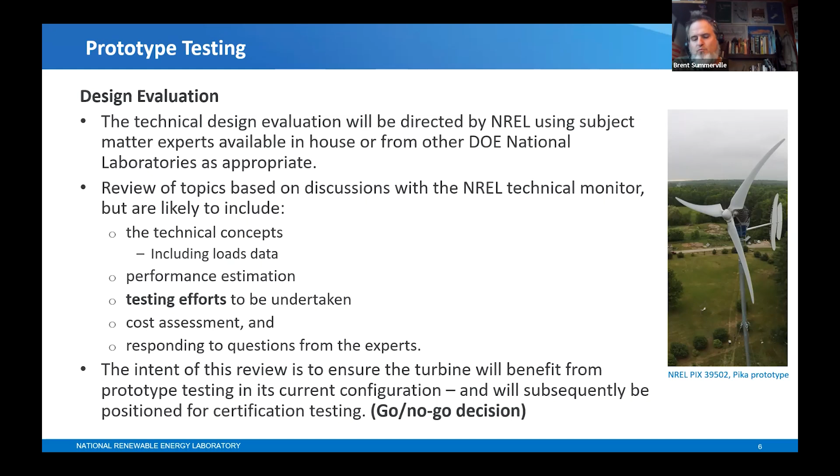Now, if you're applying for a small turbine certification award, that implies you're ready to go into certification testing and certification. Now, this design review doesn't say, hey, you're certified by NREL. It just says, okay, we've gone through the design review and it looks like the turbine to be tested for certification is likely to pass. The design is likely to be certified if the field tests are completed successfully.

It's essentially a trial run or some preparatory stage for handing over your design file to the certification body. So it's pretty good benefit. Usually you work in-house, calculation, simulation, modeling, mechanical engineering, and then you've got to convince the certification body. Here, you've got to go through NREL first, get some feedback, improve things before you get to go to the certification body, which is a benefit.

Essentially, what you're doing is what IEC 61400-2 calls a preliminary version of the limit state analysis. Show us how you got the loads, show us how you did the strength analysis on the major components. We'll do a go, no-go decision on whether this is likely to pass certification. Then, when you get to the certification body step, they'll do a more rigorous review, checking the design drawings, going to the shop floor for a factory inspection, and confirming that the loads were adequately estimated.

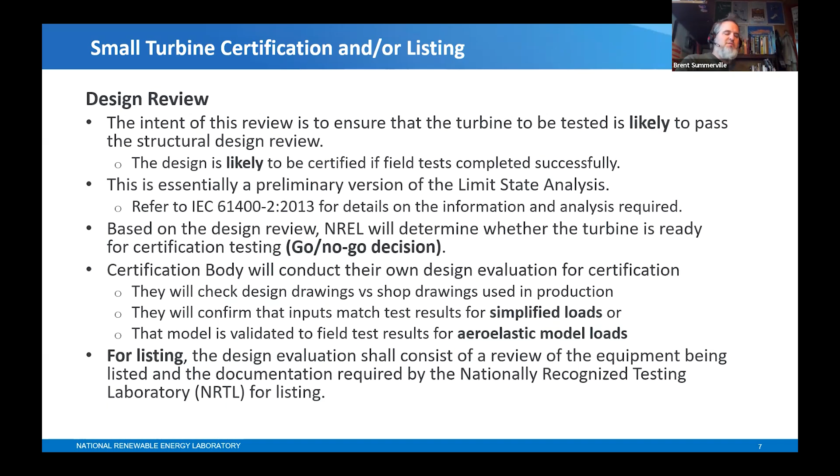Show us your design, construction review. Is everything, all the components in there, listed to component level standards? They'll put the unit, the inverter, under test, produce test reports, and then work to grant certification that it can be listed and meets the requirements of the standard. So similar process overall.

Type certification is a little different. Here we take, as an initial go/no-go determination, the design basis evaluation performed by the certification body, and review that document for the first go/no-go. That's like an initial preliminary assessment, but we count on that certification body's design basis evaluation for that. Then we do another go/no-go after the certification body completes the full design evaluation. At the end, the conformity statements from the certification body are sent to NREL. So here we rely greatly on the certification body's work for our go/no-goes.

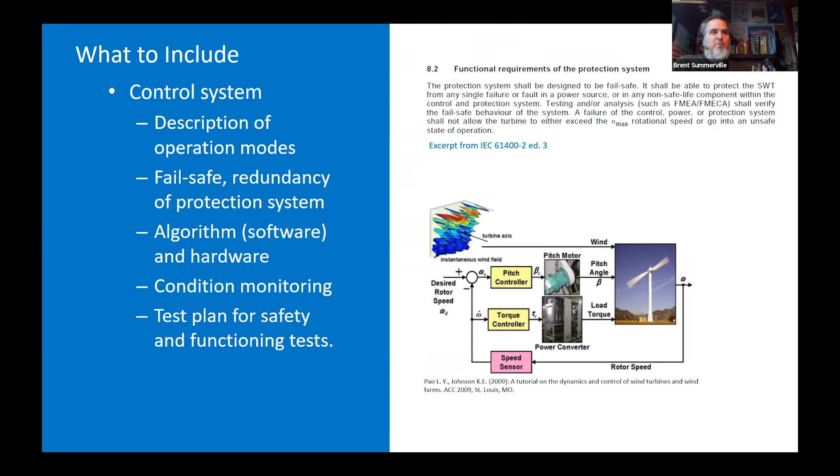So what to include: details about the control system. As you see in the standard, it describes the protection system shall be designed to be fail-safe, to protect the small wind turbine from any single failure or fault in a power source or a non-safe life component. Do some testing, do some analysis to verify that your control and protection system will maintain safe behavior for the turbine.

Design load cases: take the time to understand all the wind and fault conditions that the turbine will see. List all the assumptions of the components, provide clear commentary with references to any assumptions made, and describe the modeling or the methods used to determine the loads, which we'll hear about from Drew tomorrow.

And the loads come from interaction with the wind: aerodynamic forces, inertial forces, vibration forces, seismic, gravitational, and operational loads due to yawing, furling, grid faults, and so on, plus transportation, ice, wake, and maintenance loads. So lots of things to simulate or calculate here to get your loads.

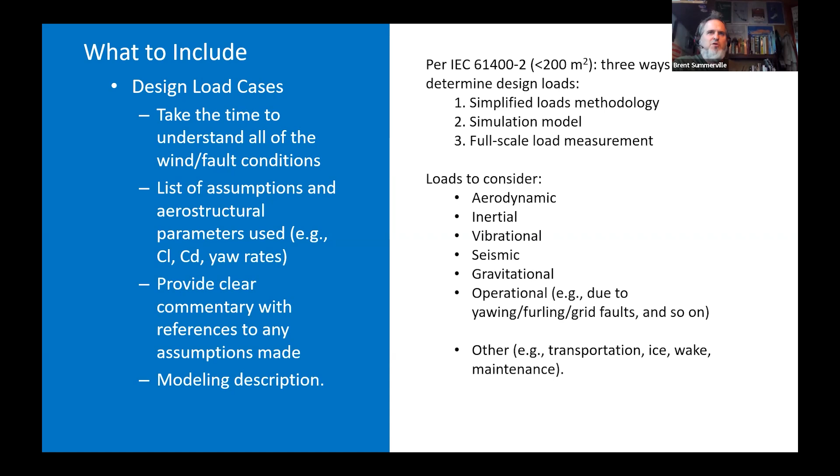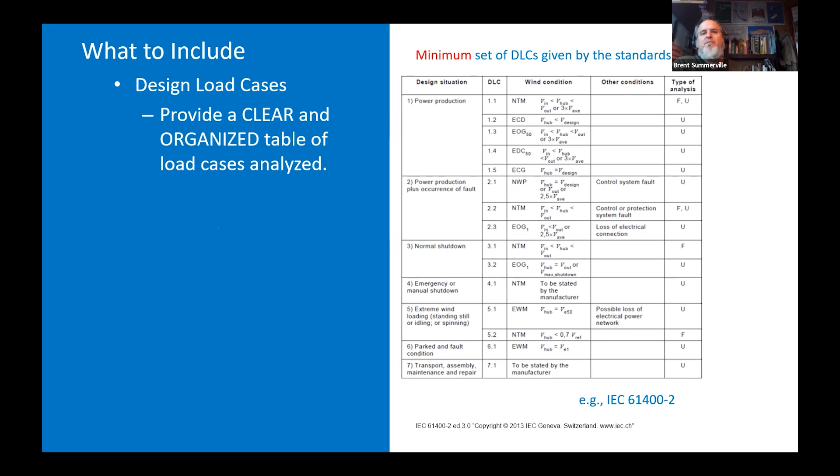The minimum set of design load cases, situations that will provide loading on your turbine: power production, normal power production with a fault, shutdown, emergency shutdown, manual shutdown, extreme wind and high winds that come every 50 years, extreme winds that come every year in a parked or fault condition, and then what are the loads when it's being transported, assembled, or maintained and repaired. Those are the minimums. There may be different ones for your turbine, your particular design.

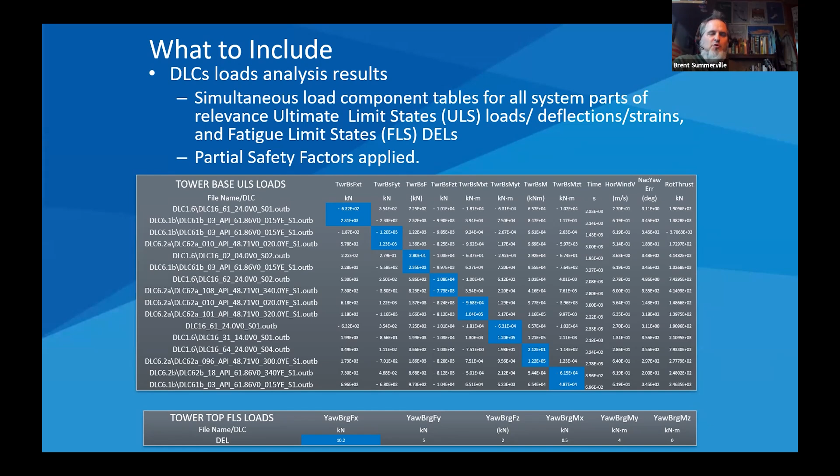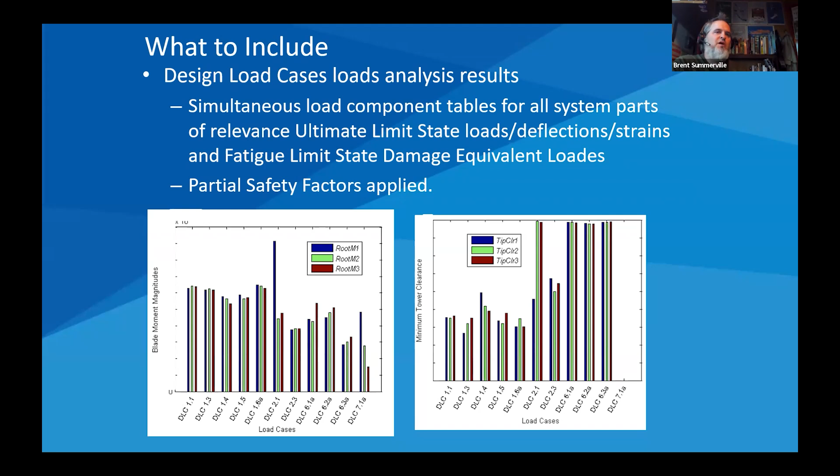So then you take all the loads from all the design load cases, and you have this table of simultaneous load components for assessing the ultimate limit states, the forces on the major components and the resulting deflections and strains, and the fatigue limit states from years and years of normal operation, resulting in a damage equivalent load. You apply the partial safety factors, then you plot and analyze the loads on each component from all the design load cases, identify the design driving loads on that component, and perform your mechanical engineering.

It shall be verified that limit states are not exceeded, so that ultimate load on that component or that fatigue load is not going to break the major component, or cause it to fail within its stated design life, typically 20 years. So you have to do a modal assessment to assess the vibrational loads and look for potential resonance, where the excitation frequency from the wind turbine may coincide with the natural frequency of the component, leading to resonance and damaging oscillations.

And you can see that by generating a Campbell diagram, overlaying those natural frequencies with the excitation forces of the spinning rotor. Software can kick that out, and then you can easily show various arrangements and how you're avoiding dangerous resonance. If you identify potentially dangerous resonance, then you can address that in the design.

You evaluate all the major components: the blade root, root-hub connection, the hub, main shaft bearings, and yaw shaft, as specified in ACP 101, and then all the components in the IEC standard certification.

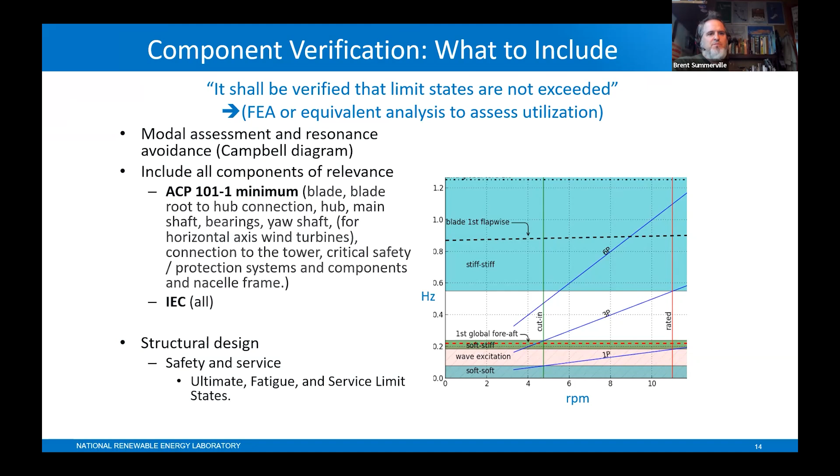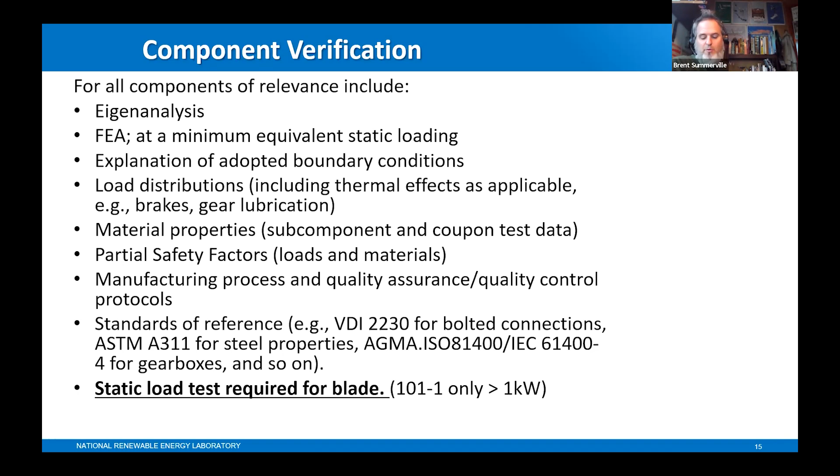We recommend you take this report, which is your report that you're building, we call it the design file, and build it to hand to a certification body to convince a third party that your gear is engineered and will hold up.

For the design evaluation as part of CIP, we recommend taking that information and putting it in a PowerPoint presentation, so we can go through the loads, the engineering, the controls slide by slide, ask questions back and forth, resulting in some follow-up perhaps, as opposed to trying to go through a Word document type report, which is a little more arduous.

So some takeaways here: this by no means has all the details you need to do a design evaluation, but it gives you a flavor of what you have to be prepared for. Some companies have internal resources that do this, some hire consultants, even the certification bodies will often hire a consultant to perform a review of the design file. You're fortunate if you're part of the CIP topic area that requires a design evaluation, to sit down with some veteran engineers, pick through your design file, ask questions, and improve things.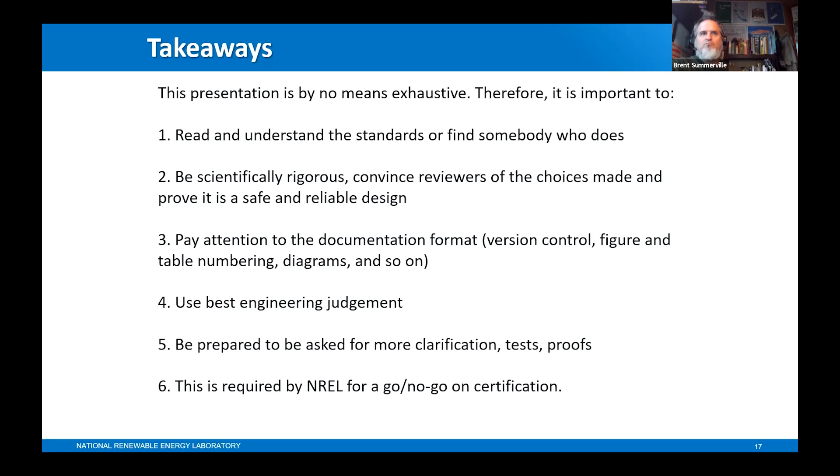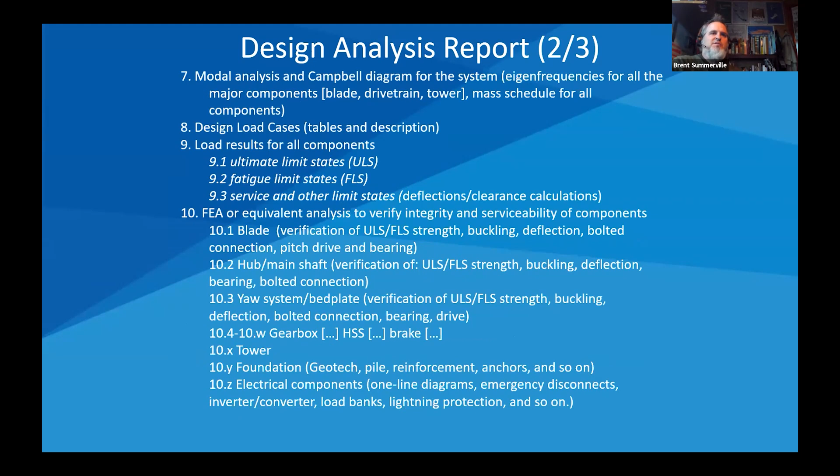I'm not going to go through this, but we've provided a design analysis report outline. We include this and share it with you as a CIP recipient, but it's in here as a bit of an annex. Okay, we made it briefly through that, and we have a few minutes left for questions about today's topics. Thank you very much for your attention.

Okay, how's it going out here? Are you guys still alive? Hey there, is anyone still here? I just see a bunch of names. There you are, so you're still in, alive, say hello, prove that you're still here as we work to wrap it up for today. I know a lot of technical information came out today, but hopefully you liked some of it, and hopefully we are clear enough. But any questions?

No, Dr. Brent. Doug from Apposite here, quick question on that last bit you were looking at. Is the criteria that you outlined available before being awarded a CIP, or is this something you would only get after the fact?

Yeah, we're happy to share that with you, Doug, it's not a secret. That'd be great. Yeah, cool, happy to share. Yeah, drinking from the fire hose, looking to get all the information you can. So we don't have these PowerPoints posted, as from the last workshop, we only have the recordings, but my intent is to try to get them up there. I'm happy to share this outline or any information you need, just reach out. Awesome.